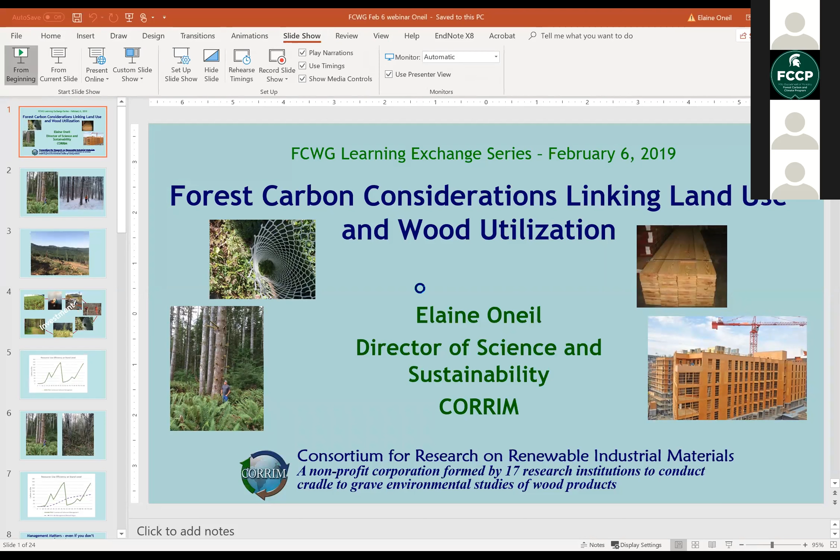Okay, thanks Lauren for that introduction. I'm on a time limit here, so I'm going to move directly into the conversation about forest carbon considerations, looking predominantly at the land use forum, and that's where my area of expertise is.

I'm going to start this conversation with a look at private forest timberland, and look at what it takes to grow it and keep it as a forest. Now, I find hardly anyone who doesn't like the forest at this stage. We all love our trees, and we love that they're also actively sequestering carbon at this point in time.

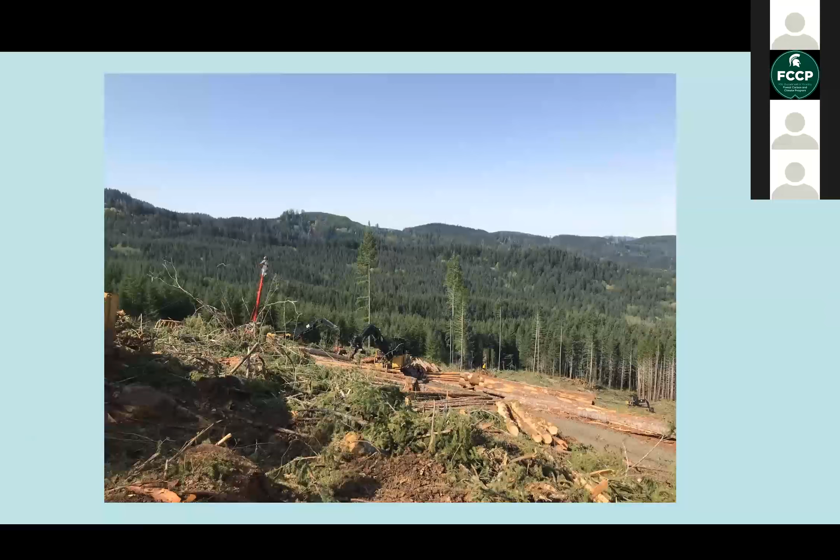Over a 2 to 3 week period. I think we tend to forget that what ensures that all those trees in the background can continue to grow and hence sequester carbon is the opportunity for profit and reinvestment.

And the investment is not inconsequential, from sowing those seedlings, doing the site prep and the planting and the protection, to managing that forest for 25 to 50 years is not an inconsequential investment. There's a tremendous amount of money, time, and labor involved in regenerating forests and protecting them from all sorts of hazards.

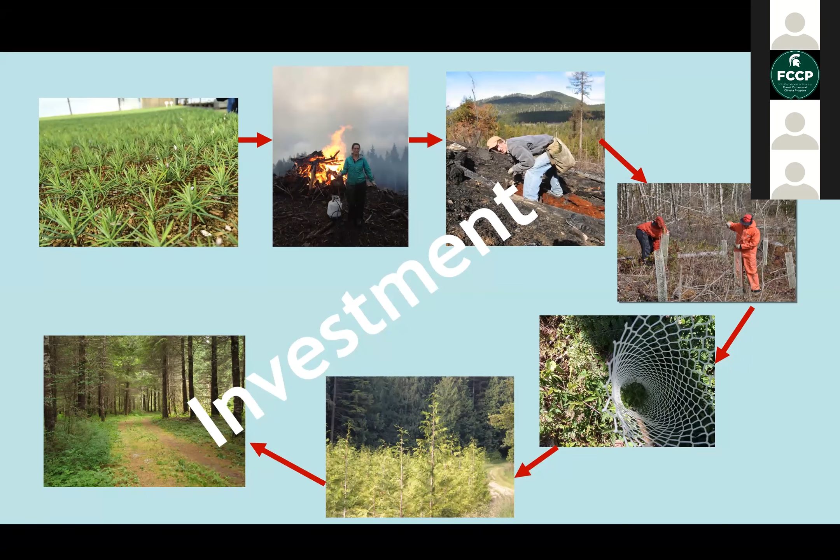Then there's a long wait, sometimes until the next generation inherits their land. Barring a whole host of potential natural disasters, that kind of investment will generally lead to a well-stocked forest stand that can sequester a substantial amount of carbon while it's growing to maturity for the next harvest.

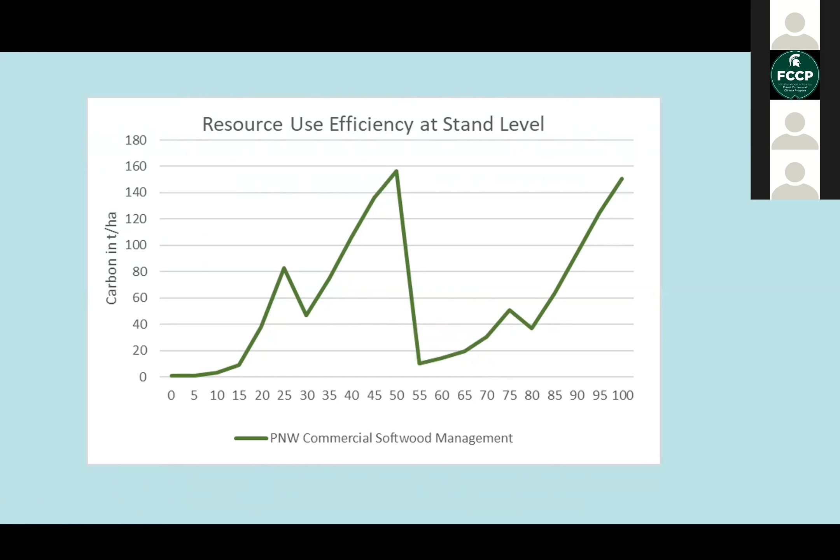The second alternative does not make good use of the site, so from a resource use efficiency standpoint, it's not necessarily a good alternative, but it is the alternative when there really isn't that opportunity for investment and recovery of investment through harvest.

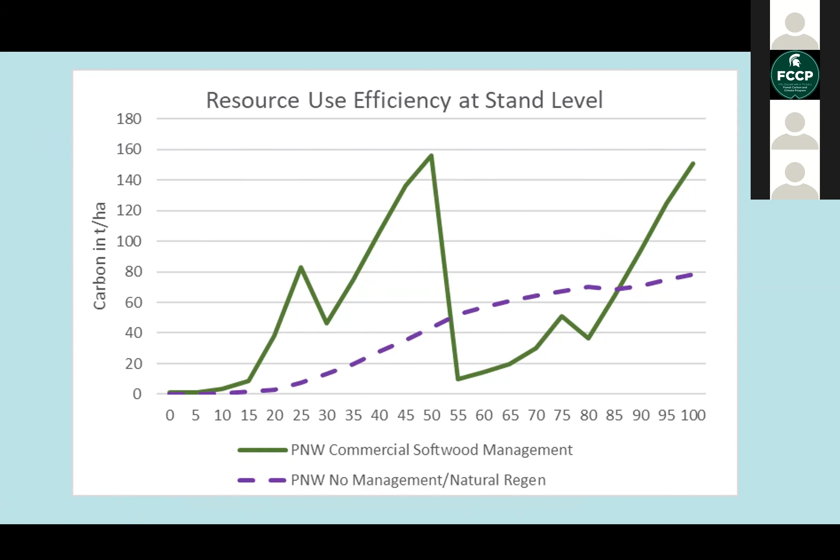Now, because tree volume is directly correlated to carbon sequestration, the acre that you don't manage doesn't sequester as much carbon either, and it doesn't do it as quickly. That's shown by the comparison here of the Pacific Northwest no management natural regeneration alternative, which you should be able to see as a dotted purple line. There's a substantial difference in the ability for forests to sequester carbon under management versus no management.

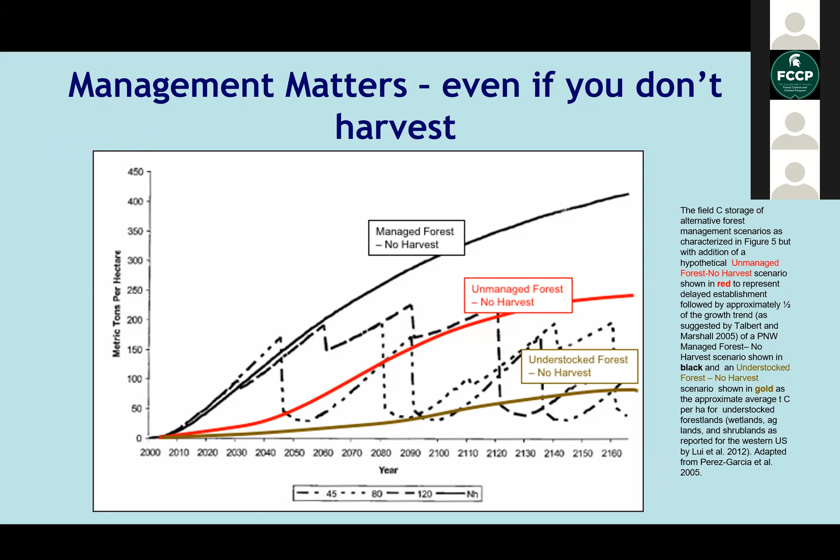Clearly, with investment, we can grow trees bigger, faster, and better, but that investment does come with the expectation of harvest.

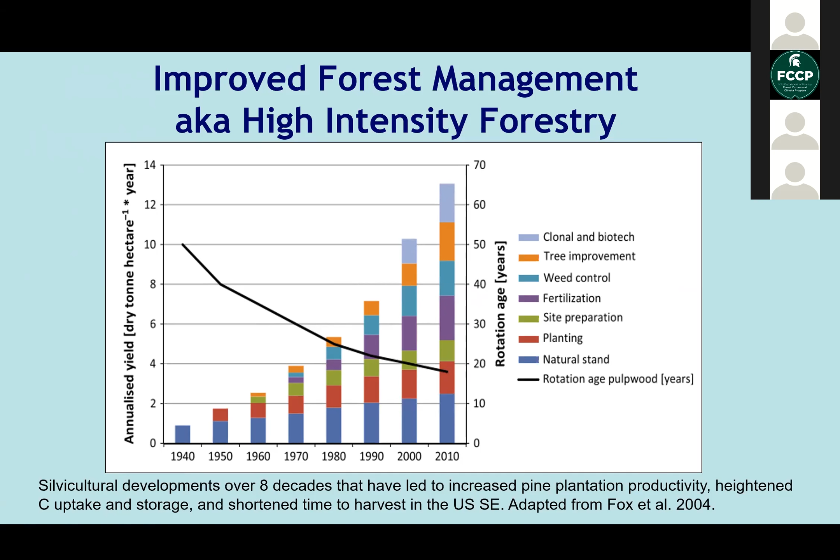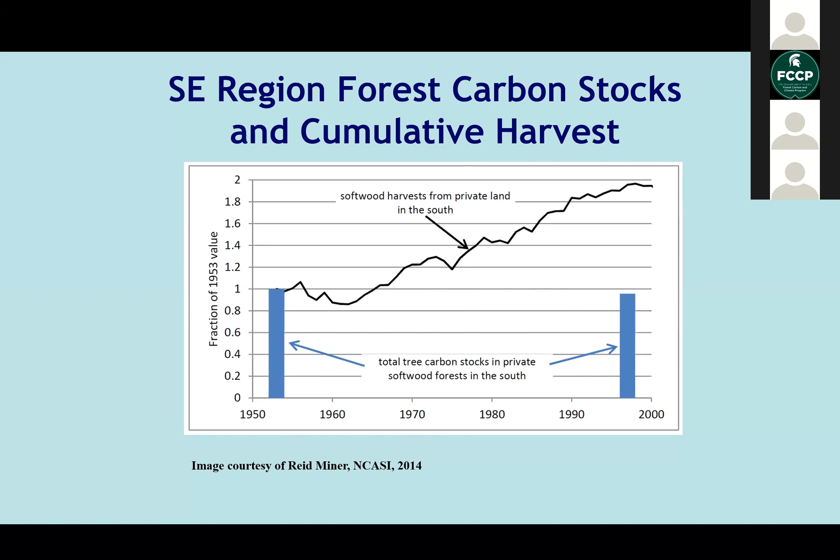So what we're seeing is that the land is sustaining its carbon, the carbon volume on the land, while we're continuously removing carbon and putting it in for other uses, whether long-lived products or pulp, or currently pulp pellets.

Now I want to go back to that clear cut for a minute, and I want you to look beyond it to the forest land behind it. That particular forest land is all owned by the same landowner that's doing the harvest. There is a myth of the carbon debt that arises because in this harvest scenario, we only look at the clear cut and forget that the land behind it is part of the package deal.

The carbon on a single acre, like that clear cut, looks like that big swing in forest carbon that we're showing on this particular chart. Here we have 200 years on the x-axis through time, 50, 100, 150, 200, and then metric tons of carbon per hectare. I mean, this is stylized, but it's there to demonstrate the point that in a single acre, yes, you get this increase and decrease fairly dramatically, 50 to 150 metric tons of carbon per hectare on a single stand.

But when you start at a small landscape, it starts to look more like that small squiggly teal line. And then at scales that provide long-term sustainable wood supply, it looks like that black line. In other words, it's nearly flat.

So that example where I talked about the Townsends, they have about, I want to say 300 acres. And they have a long-term management plan. They know exactly what they're going to do and when they're going to do it. They probably look like the little squiggle, but they're not the only supply to a mill. And when you want to maintain a milling infrastructure, you basically need that flat line of supply, which means you don't have a carbon debt.

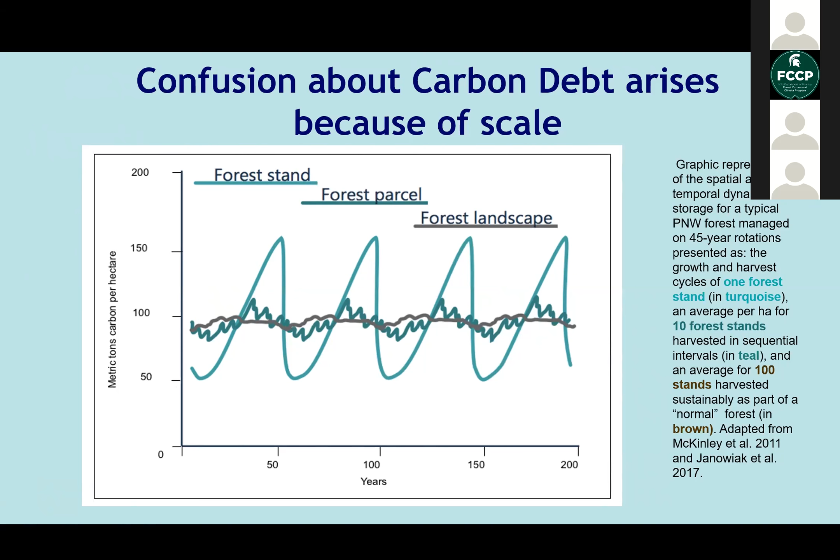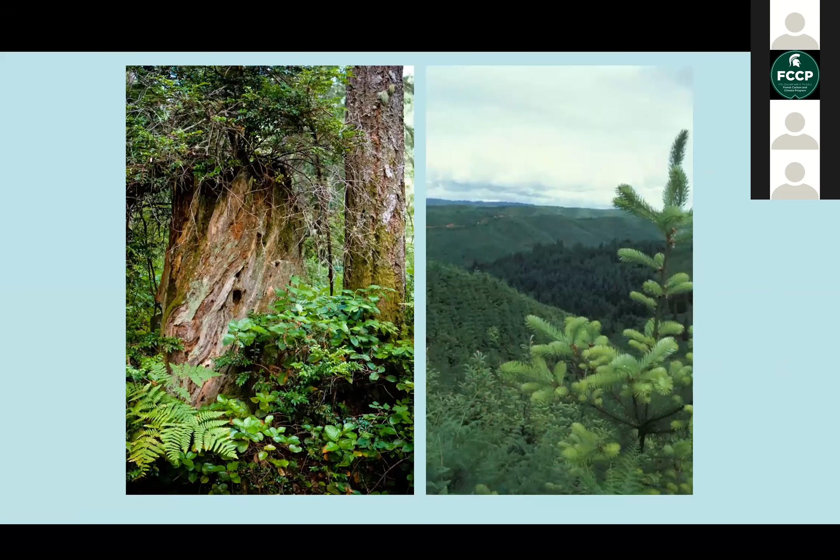Which leads to a very brief discussion on the difference between old forests and young forests in terms of carbon sequestration. These are a couple of my favorite pictures. I love both of those forests, but they have different consequences when we're talking about forest carbon and how we want to use forest carbon as a mitigation for climate impacts.

In terms of resource use efficiency, if that was the only thing we were measuring, and I'm not saying it is for national forests, they have lots of other purposes for being, but in terms of resource use efficiency, we could say this is not an efficient mechanism for maximizing carbon sequestration from the atmosphere.

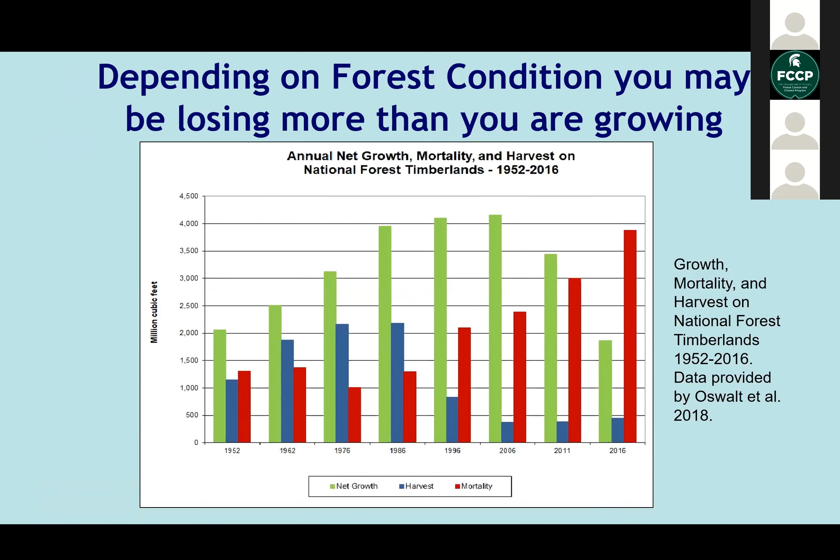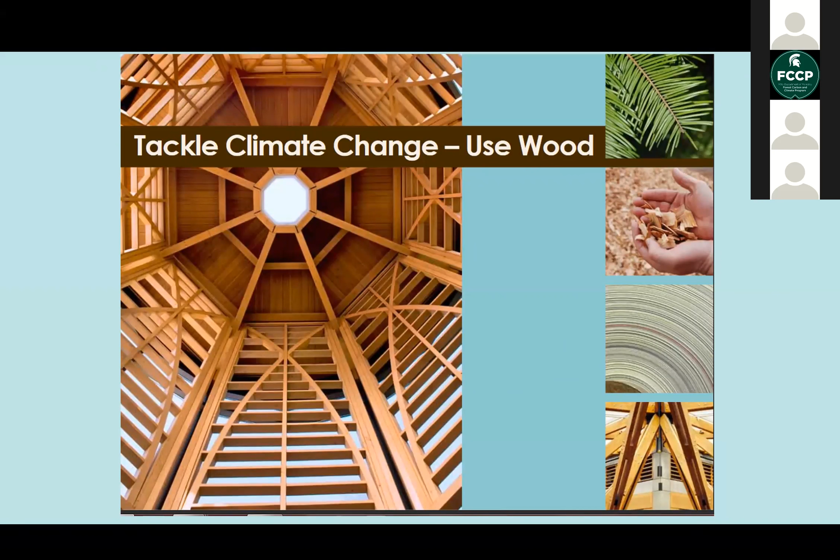CORRIM has spent over two decades looking at the way wood fiber is currently allocated among products, and where it generates the biggest bang for the buck in terms of carbon footprint, resource use efficiency, and optimal substitution opportunities that not only have a demonstrably lower carbon footprint, but which outperform alternative systems. This particular chart looks at all of those comparative alternatives.

We've tracked everything from the time we germinate the seedling and put it in the ground, grow it, harvest it, take it to the mill, and divvy it up into all these products, and then we start looking at alternatives. A lot of that work has been done, so we have a pretty good idea of where the pluses and minuses are.

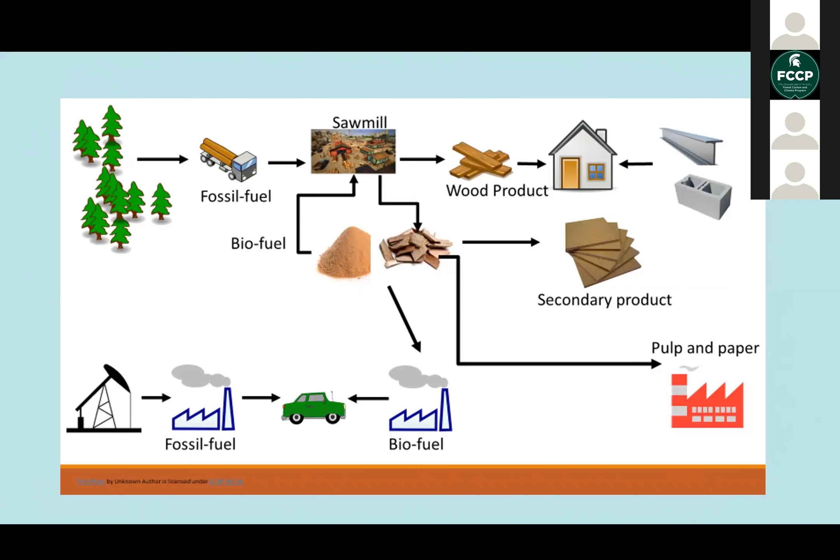Using this attributional LCA framework, which builds on primary data from hundreds of manufacturing surveys, we get a clear idea of where various products fall in terms of efficiency. Here we're measuring efficiency in terms of fiber used per unit of product. On the y-axis we have kilograms of fiber needed per cubic meter of product, covering lumber, I-joist, cross-laminated timber (CLT), plywood, particle board, and laminated veneer lumber (LVL). You see a gradient where we need more wood fiber per cubic meter in LVL than in lumber, largely driven by the density of the final product.

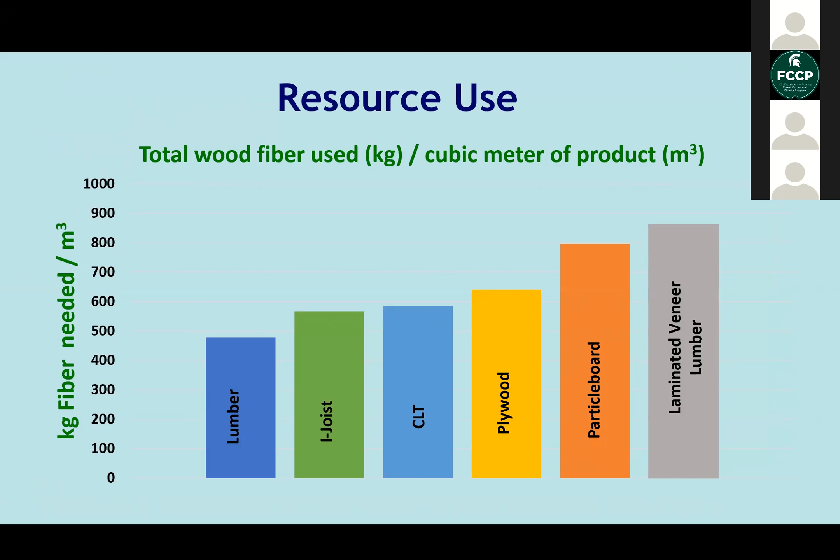Now, those comparisons are somewhat useful for us academics and meet the requirements for LCA because you have to put it on some kind of unit, but they're not as useful as comparing resource use efficiency on what we're calling a functional unit. In this case, our functional unit is a square meter of wall assembly, which serves a function just like a square meter of floor.

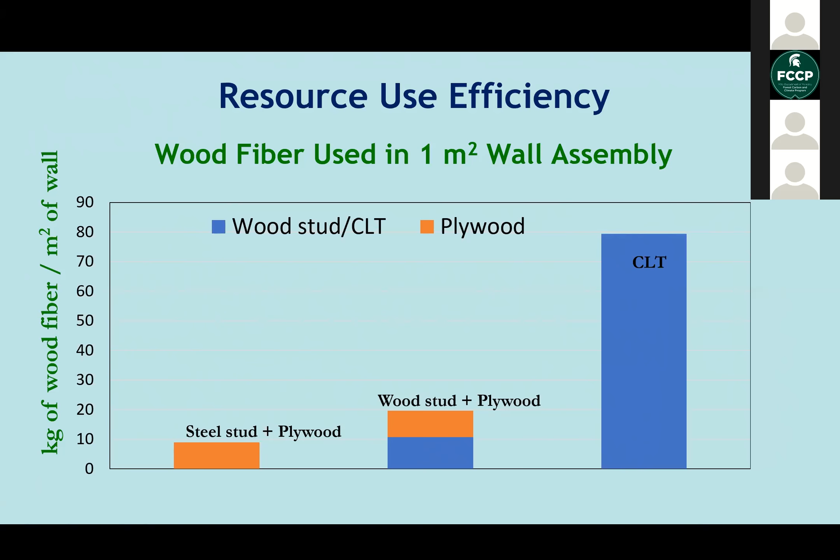But on the flip side, because it's not very efficient from a resource use standpoint, it does store a tremendous amount of carbon relative to other alternatives. Here it's compared: lumber to steel to concrete block to CLT, again in terms of carbon stored in that wall. So if part of your goal as a builder is to have a building that serves as a large carbon sink, then something like cross-laminated timber or other mass timber products have significant pluses over conventional construction.

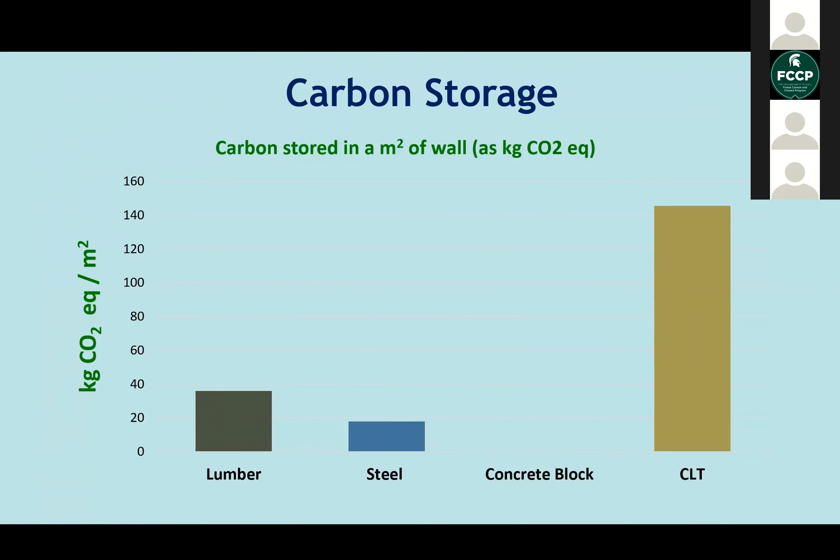This is just one example of a comparative analysis. It builds step by step from the point of the seedling until the wood product enters the building as part of a wall.

I would say that many more of these kinds of comparative analysis are needed, not just on the functional unit basis, but on the whole building basis, so that we can find the highest leverage for what is essentially a scarce natural resource, sustainably produced wood.

And with that, I wanted to pass this on to George, because I think he has the other part of this story that I'm very much looking forward to hearing.

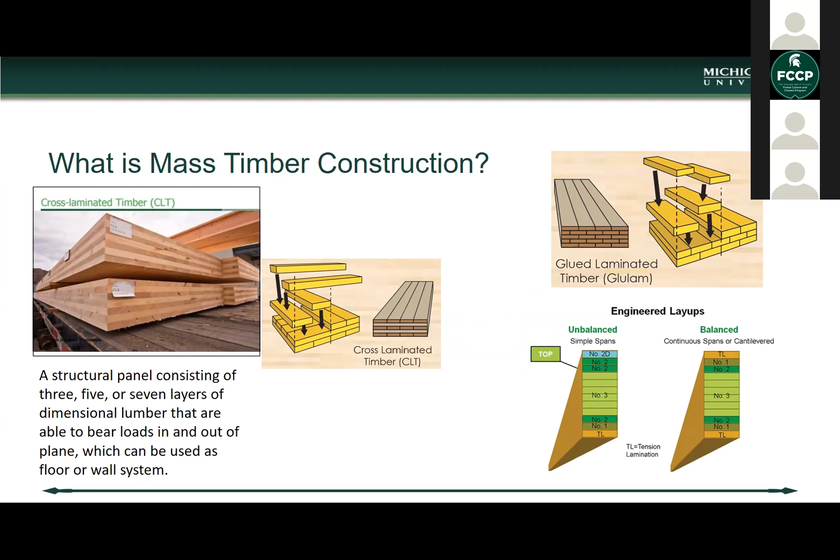Just to give you a couple of examples of buildings constructed using this modality: the first picture here is the T3 building in Minneapolis, a 7-story commercial building that from the outside you would not know is a mass timber structure, but it is. This was built within the last 2 years and shows that designers and contractors in the United States are moving forward with mass timber structures, even without a current code structure that supports easy adoption of this technique. The current building code allows for up to 4 stories of mass timber. When you see larger structures like this—6, 7, 8 stories—they're either built on a concrete podium, with some floors concrete, or they've gotten special permission from the local building office to exceed 4 stories.

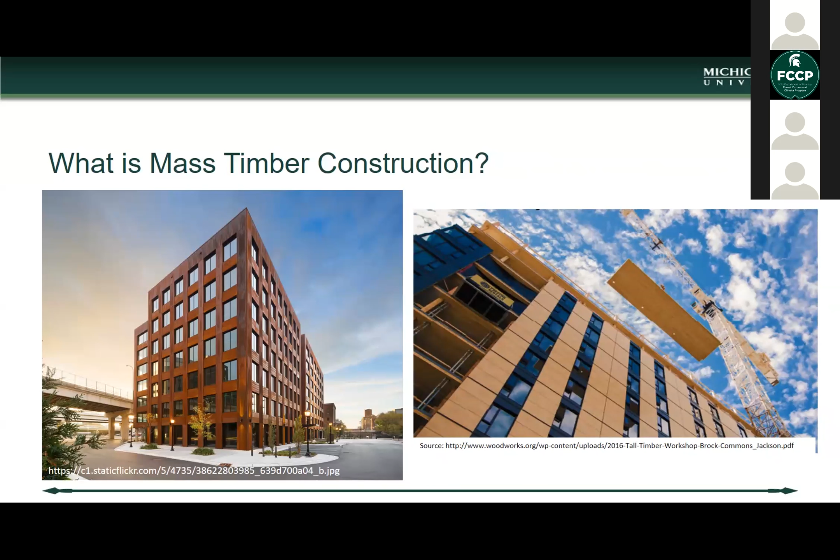The building to the right is Brock Commons, a dormitory building at the University of British Columbia. It's 18 stories, and again a mass timber, CLT structure. You can see floor slabs being lifted into place, which gives you a sense of the size of these panels and what's possible with CLT.

The final picture I'll show, just to orient you—we'll talk more about this project and Brock Commons later. This project is Candlewood Suites, a hotel from a national hotel chain here in the US. It was built on the site of Redstone Arsenal, an Army base in Alabama. This was an all-CLT project, the first that Lend-Lease constructed purely from CLT. There was significant interest in the blast resistance properties of CLT for this project, since any structures on a military installation have to meet force protection requirements. But my interest in this project has been some of the metrics around the time and cost considerations of the construction.

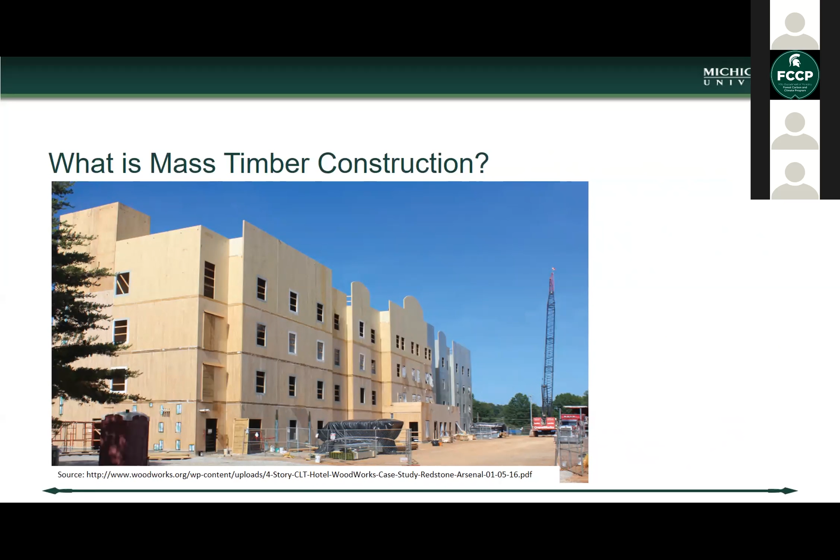Moving into those time and cost benefits, mass timber buildings typically feature time and cost savings arising from a couple of areas. The panels tend to be lighter with the same or even a higher strength-to-weight ratio than reinforced concrete, so the size of the crew used to erect these structures can often be reduced—there's a labor savings. The size of the crane needed to hoist these panels can also often be downsized. Additionally, construction time tends to be quicker because of the size and relative lightness of the panels, leading to indirect cost savings on items paid on a recurring monthly basis—temporary facilities, equipment rental, facility rental, overhead costs, and so on. There's also potential reduction in foundation size, due to a lighter superstructure meaning less load for the foundation to support, so smaller, lighter foundations are possible.

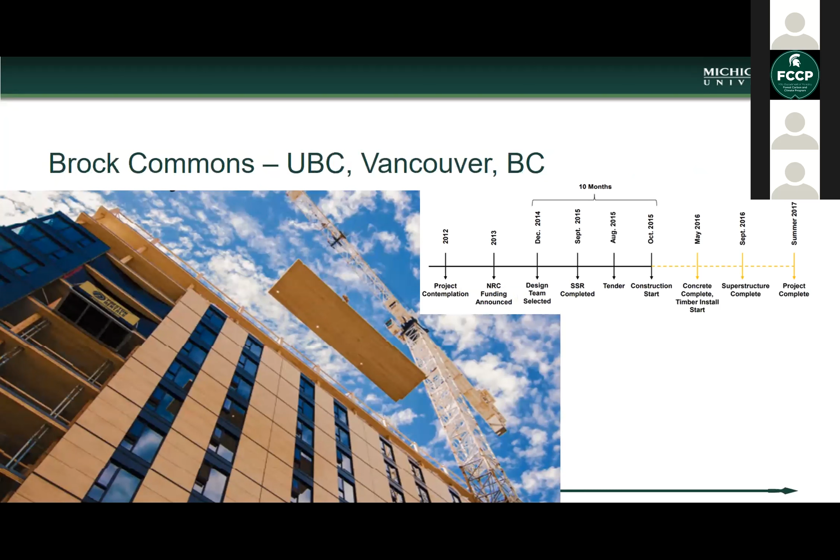Looking at two case studies, starting with Brock Commons in Vancouver, British Columbia: the concrete podium portion of the structure was complete and the timber installation began in May 2016, for this 18-story building. The superstructure was complete by September 2016—an overall 4-month timeline to get that entire superstructure up, which is not uncommon performance for CLT. The question that often comes up is how CLT prices out compared to reinforced concrete or steel. The material tends to be more expensive, but because of the time savings, in this comparison prototype, you end up with a per square foot price that basically comes right in line.

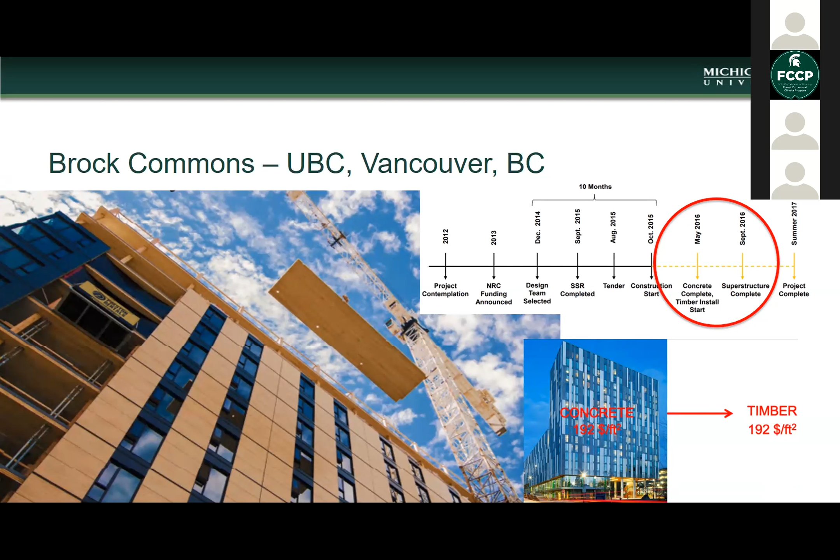So in this case, Brock Commons came in directly on target with the same square footage price for a like concrete building. In the case of Candlewood Suites, I want to talk about time reduction, because time is where we're going to get into some of the carbon related issues.

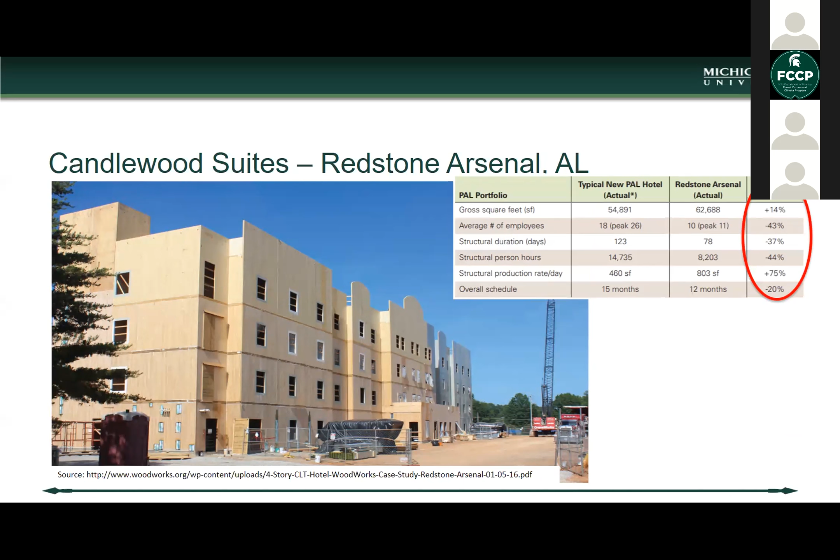On the time reduction side, you can see on the right-hand side of that chart that you had a smaller crew, and your structural duration, the erection of the actual superstructure of the building, was reduced from 123 to 78 days. The number of person hours to complete the structure were greatly reduced.

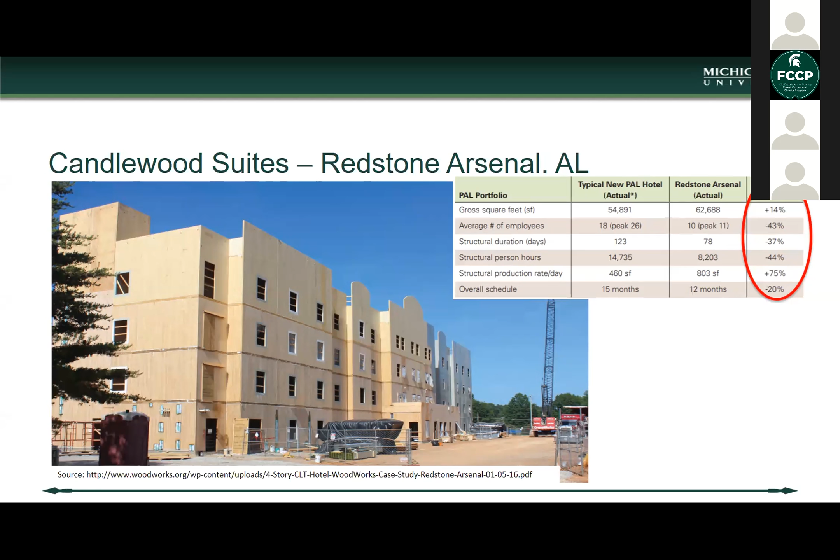You had a higher structural production rate per day, and overall the project saved 3 months in the overall schedule. So there's some interest in how changing the process could have a positive impact on the project's carbon budget. We'll switch gears into that now, and look at a hypothetical $1 million worth of value in the US commercial building industry.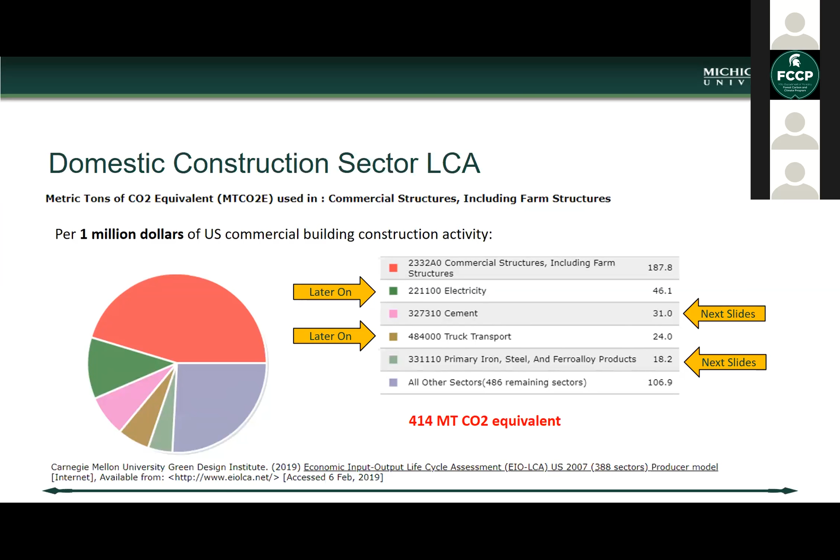Similarly, and I'll get to this point a little later in the presentation, I want to look at the electricity and truck transport pieces of that emissions budget as well. We'll take a look — and we need to be careful about scale as we go through these numbers — at how electricity and truck transport impacts may be mitigated.

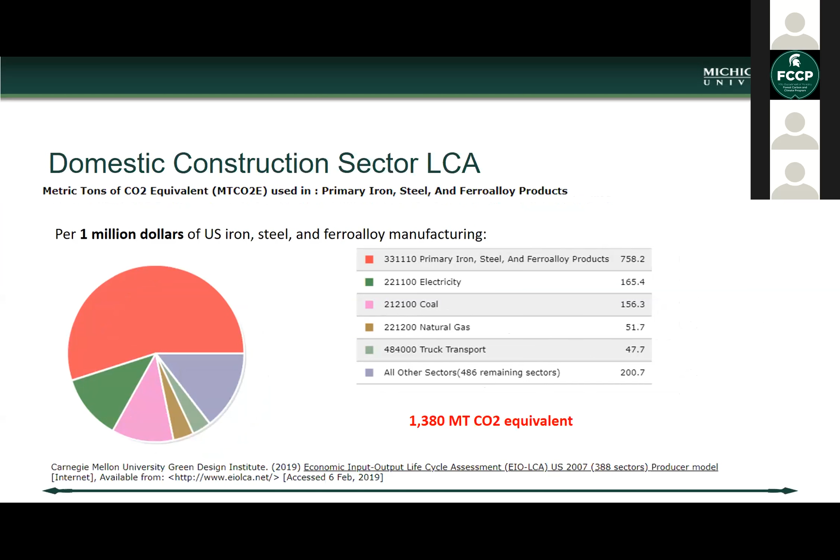So we'll start with conventional materials, and again we're just going to take $1 million as our hypothetical amount of activity. This is $1 million worth of steel. We find that generating that $1 million worth of steel in the US produces about 1,400 metric tons of CO2 equivalent. If we go into ready mix concrete, we find that we're getting about 2,240 metric tons of CO2 equivalent through that amount of activity.

With ready mix concrete, the vast majority — and you can see the numbers here, this is an order of magnitude difference — is coming from cement production. This is nothing new; we've known for years that cement production tends to be the place where we see the greatest use of energy and the greatest potential for greenhouse gas emissions from the concrete industry.

So we've taken steps within our industry to try to replace some of that cement with things like fly ash and other materials that reduce that overall burden. But this is still what we're looking at per $1 million of ready mix concrete manufacturing.

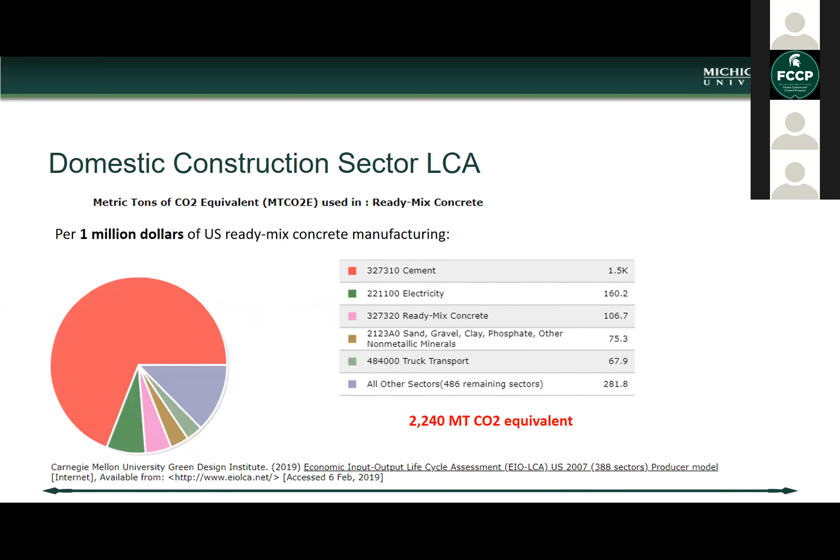Now if we flip over to some of the alternatives, unfortunately we don't yet track mass timber as its own industry segment, and this EIO-LCA model from Carnegie Mellon tracks along NAICS codes. So if there's no North American Industry Classification System code, you have to find analogs. I used veneer plywood and engineered wood as my analog, and found that for $1 million of producing that material, we're at about 442 metric tons of CO2 equivalent.

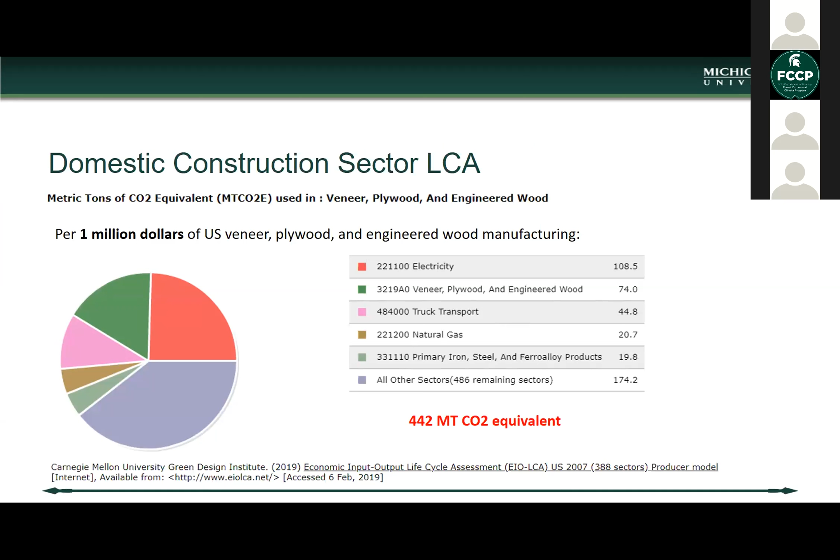So in terms of the scale and order of magnitude of these numbers, this supports some of what we've seen looking at the overall carbon budget for these buildings once they've been constructed. But now let's look at vehicle usage during the construction process, using Redstone Arsenal as an example.

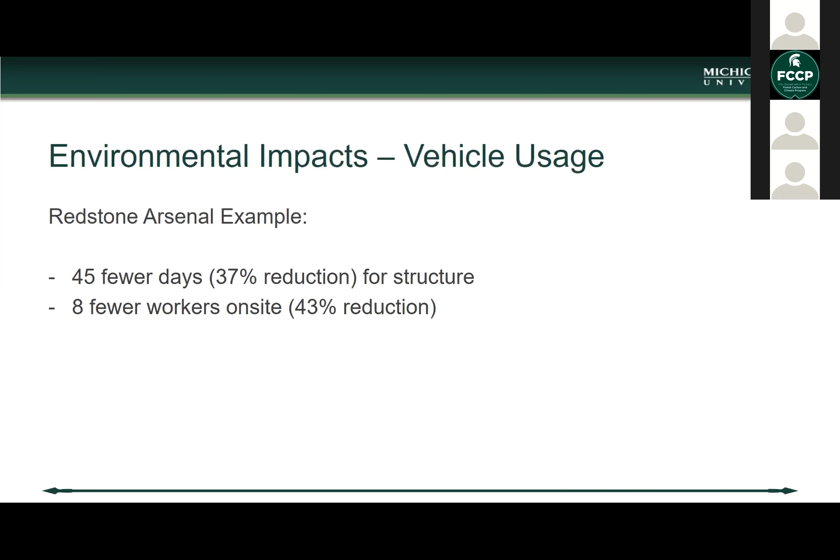We know that we had 45 fewer days used for the structure, and 8 fewer workers on site. We can look at the tiered emission standards that have been brought into play in the US for vehicles.

Basically, once you get above a 135 kilowatt engine, the tier 3 emission standards from 2006 capped all of those engines at 3.5 grams of carbon monoxide per kilowatt hour.

So we can look at some of these reductions and ask, in a scenario where we're not sure exactly what has been emitted from one of these buildings, how can we calculate what the impact of less construction time, a smaller crew, and less crane utilization might be on the project's carbon budget?

What we find at the very minimal end is that we might be reducing about 1,000th of a metric ton of carbon monoxide from cranes, and that's before considering downsizing cranes, because some cranes have a small enough engine to fall below that 135 kilowatt threshold, putting them in a different emissions category under the tier 3 standards.

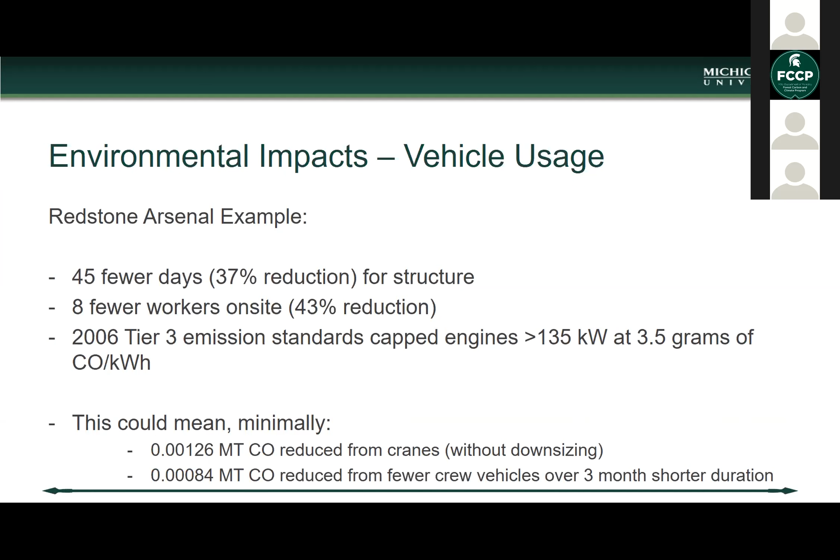We also reduce some carbon from having fewer crew vehicles over that 3-month shorter project duration. So these aren't large contributions, especially when you consider that $1 million worth of concrete gives us over 2,000 metric tons of carbon equivalent. But it's still a contribution to the project carbon budget nonetheless.

The other issue to consider is transportation, because one problem with mass timber construction in the United States right now is that we don't have a large network of cross-laminated timber manufacturing facilities. In the case of the Redstone Arsenal project in Alabama, they sourced CLT panels from Nordic Structures in Quebec, quite far into northern Quebec, so they had about a 1,500-mile trip to bring those panels.

So I wanted to look at how transportation of materials plays into the carbon budget for those materials. We started with 1 cubic yard of site cast concrete, ready mix concrete brought to the site and cast there. In the case of Redstone Arsenal, there's a ready mix plant 11 miles away from the building location.

That's fairly common in most locations in the United States. Most places are within a reasonable distance of a ready mix plant, otherwise you couldn't get the ready mix to your site before it started to cure.

So for 1 cubic yard of site cast concrete, you don't even generate a bar on this scale for CO2 equivalent in metric tons. That 1 cubic yard of site cast concrete comes out to about 4,050 pounds.

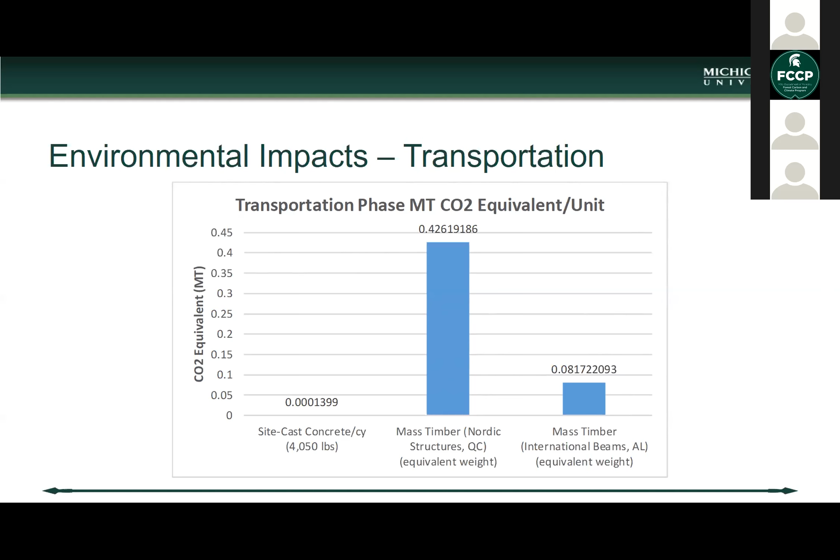I want to take a couple of minutes to talk about changing how we might look at mass timber, and where some of the carbon budget for CLT and other mass timber products may come from. We're looking at the possibility of using salvaged lumber to manufacture the product.

The takeaway here is that in North America, we don't really do very much in terms of recycling and reusing lumber. Most of it ends up in the landfill, incineration, or downcycling, so the carbon budget would be perceived to be negative at that point.

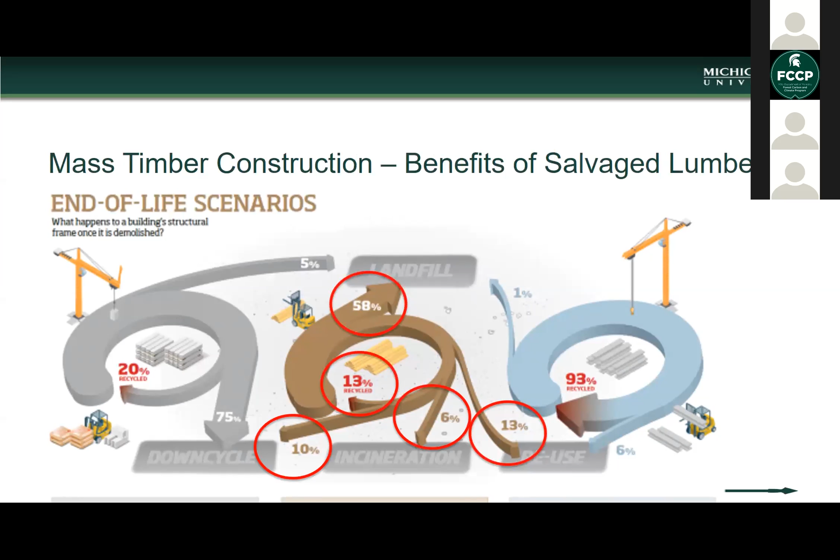That motivated us to do a study looking at salvaged, reclaimed lumber coming out of old homes in Michigan, and whether or not that could be put into production for CLT or glulam.

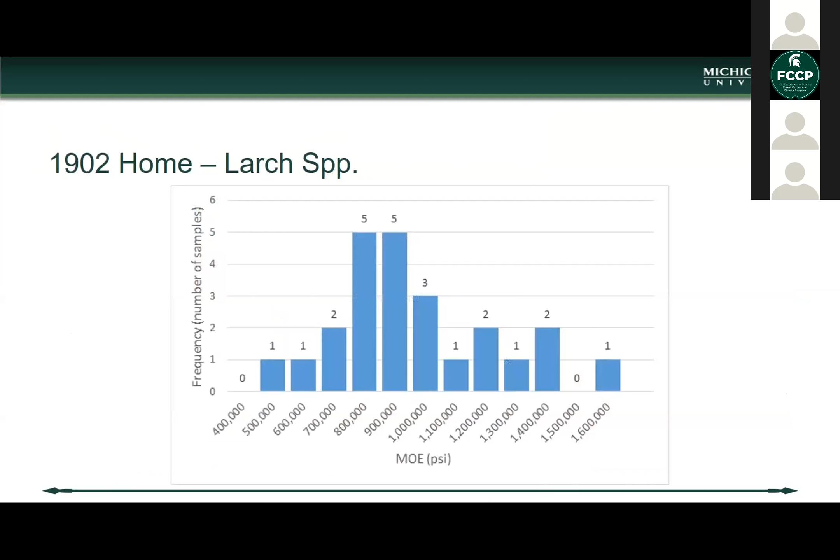I won't bore you with the details on these slides, other than to say that we found 84% of our samples from one specific home passed the E3 stress class, which is the most common entry classification for lumber going into the manufacture of CLT.

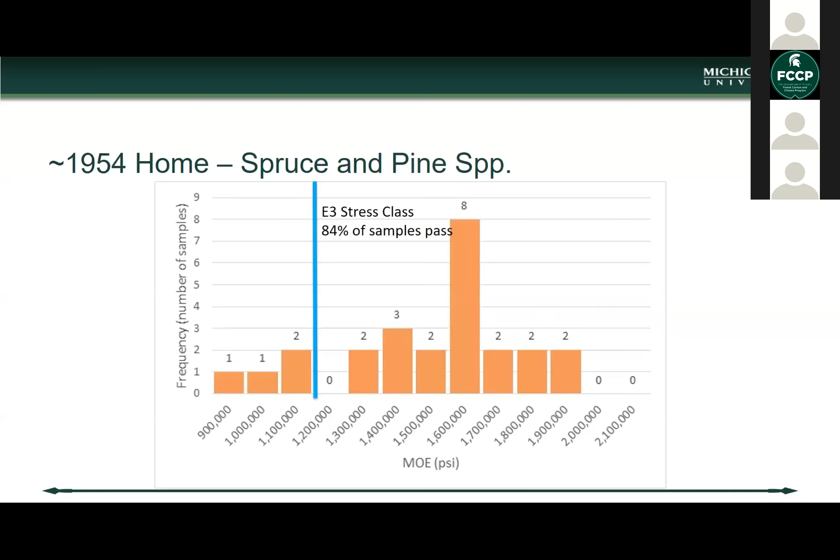So 84% of our samples could pass going into the CLT manufacturing process. So then we said, okay, what does that mean if we could take a house worth of lumber and turn it into CLT? What would that mean for carbon budgets? How would we change our project carbon budget by accounting for carbon in other ways?

What you see on the left-hand side of this slide is what happens when you landfill 8.6 tons of wood, about what we find in an average house in mid-Michigan, versus what would happen if you could put 5 tons of that 8.6 into source reduction—using it to replace virgin material in the manufacture of CLT or glulam. If you still had some recycling and some potential landfilling and combustion for material not of good enough quality to be reused structurally, per home you would be saving about 6 metric tons of CO2 equivalent.

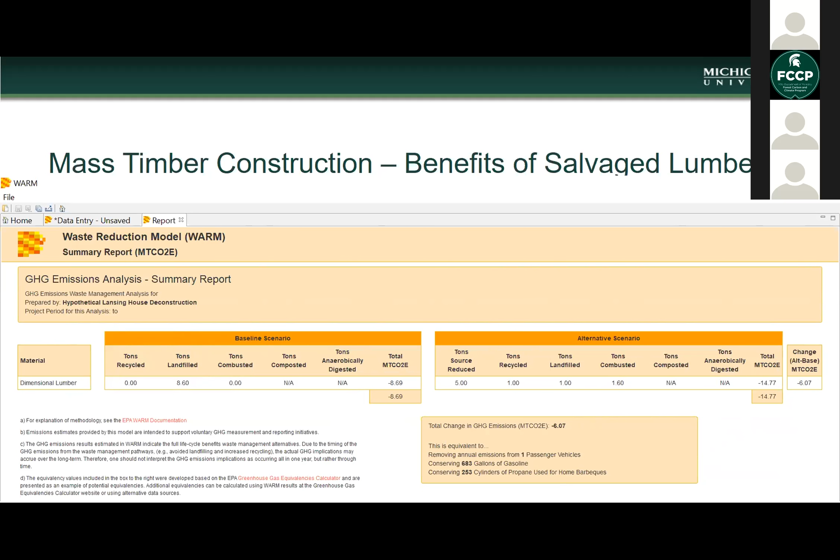That's about the annual emission from one passenger vehicle. You can read the rest of the impacts, but just hold on to one passenger vehicle, since that's going to be the easiest one to remember on the next slide, because we don't just have one house that needs to be dealt with because it's abandoned in Michigan.

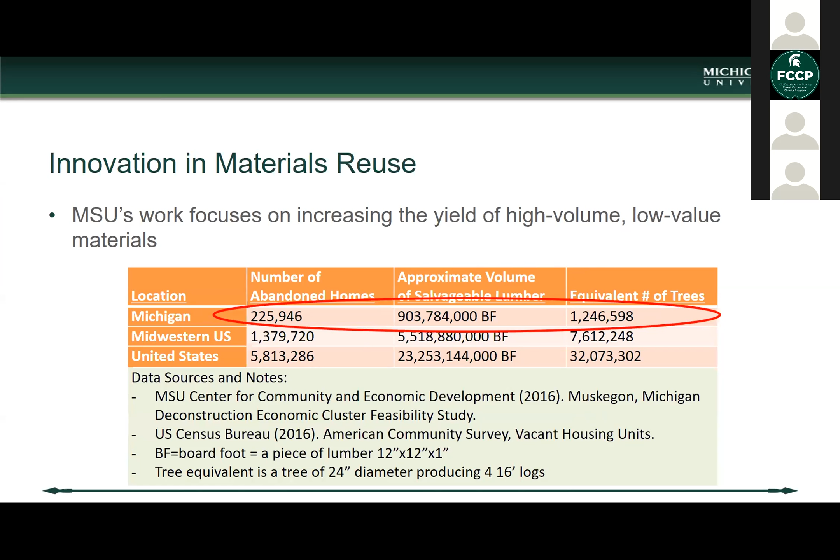We have 226,000 of them in Michigan. So if we could start putting that material into productive use, you just start to get the sense of where the scale of this could go as we start thinking differently about how we source material, looking at this as part of the overall carbon budget and carbon management strategy, both in terms of virgin timber and salvage material that would otherwise just go to the landfill and produce a net release of carbon.

So when you look at this volume of lumber in Michigan, I put it into perspective in terms of what those numbers mean: 903 million board feet. It's a lot of furniture. You can read the numbers. And the point is we're probably not going to be able to salvage all of it, which is why most of it goes to the landfill and becomes a source for atmospheric carbon.

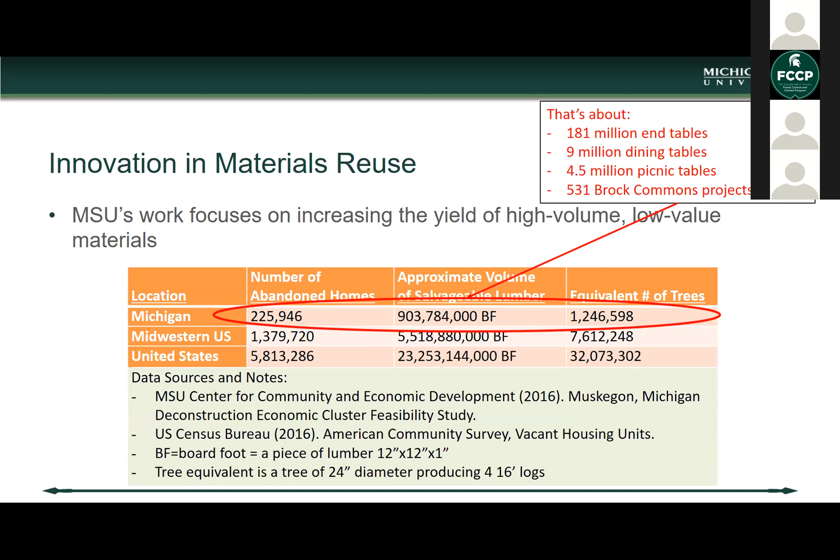But you could take that material and manufacture 531 new Brock Commons buildings. Again, I'm not saying that's what we're going to do, but I just want to start to change some thinking and poke a little bit about how we might rethink how we handle some of this material.

I'll close with a final slide on looking at use phase energy benefits in mass timber construction. We're doing a little bit of work now on a new project being developed where we basically took a hypothetical 1,000 square foot building module. This is for a high-rise mass timber building located in the upper Midwest, but they're doing it in 1,000 square foot modules. So we took one module.

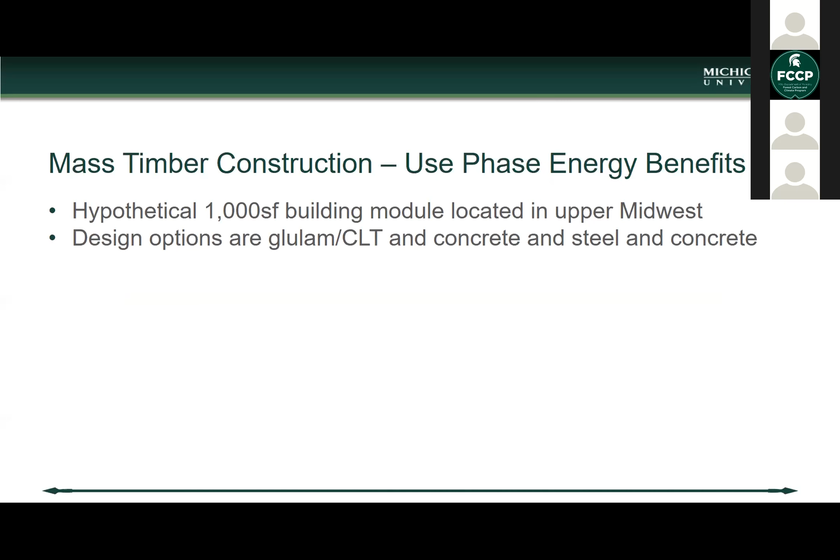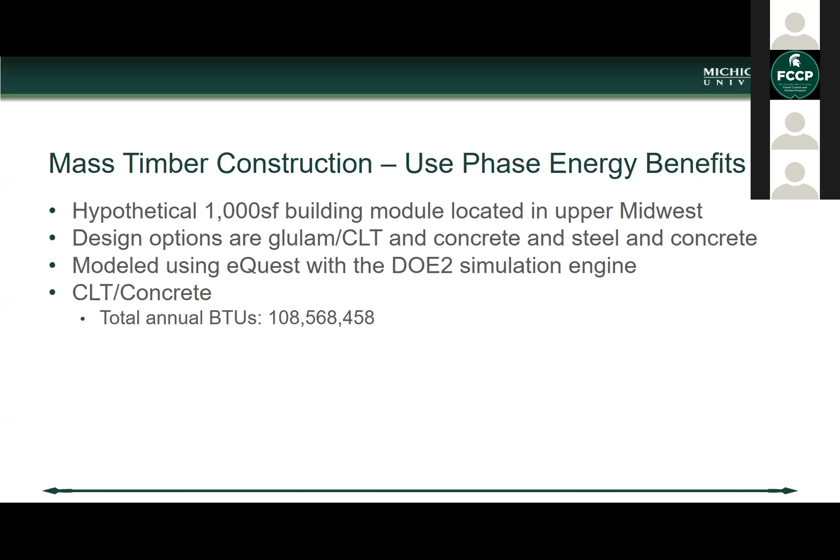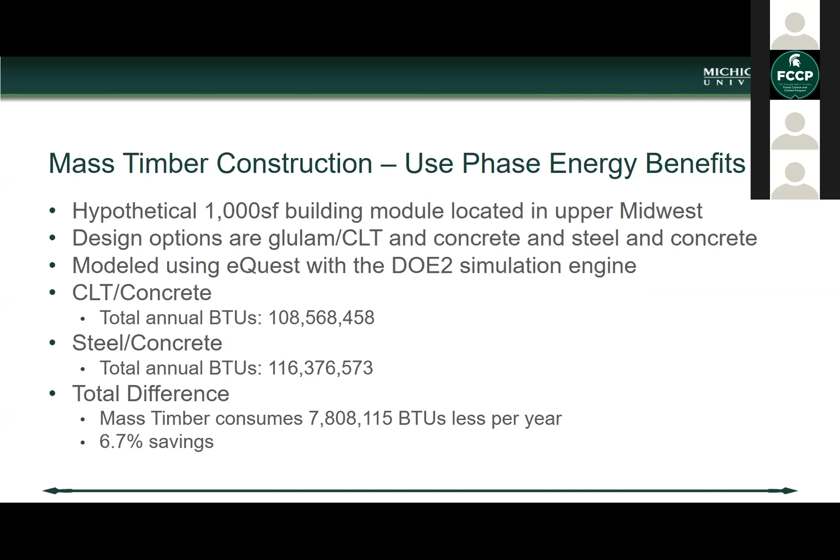Design options were either glulam with CLT and concrete floor and roof decks, or a steel frame with steel and concrete floor and roof decks. We modeled that module using eQuest with the DOE2 energy simulation engine, and you can see what we came up with. Basically, we believe on an annual basis we would see about 7% savings in our energy budget from that building. Given our location in the upper Midwest, the majority of those electricity BTUs are coming from coal-fired power plants. So again, we're looking at something where there's an additional carbon benefit to the budget for the project beyond just the material itself, thinking more broadly about where these benefits come from.

Where we're going with this for the future, we are working on a time and cost development tool, which is funded by the Forest Service right now. I bring that up because if we have a better handle on the time piece especially, then we can connect it to development of a full LCA model for mass timber building prototypes. Right now we really can't get to that point. We'd like to. So the first step is getting that time tool developed fully, and then moving into LCA model development for those building prototypes.

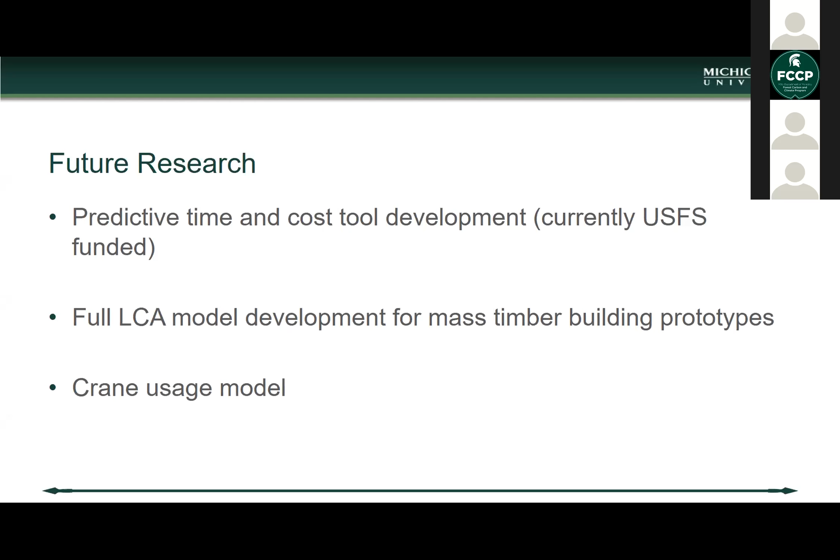One piece we're particularly interested in is the crane usage model, and what those fugitive emissions and the carbon budget look like when you start to change crane usage, both in terms of the hours the crane is running, as well as the size of crane required for the project being built.